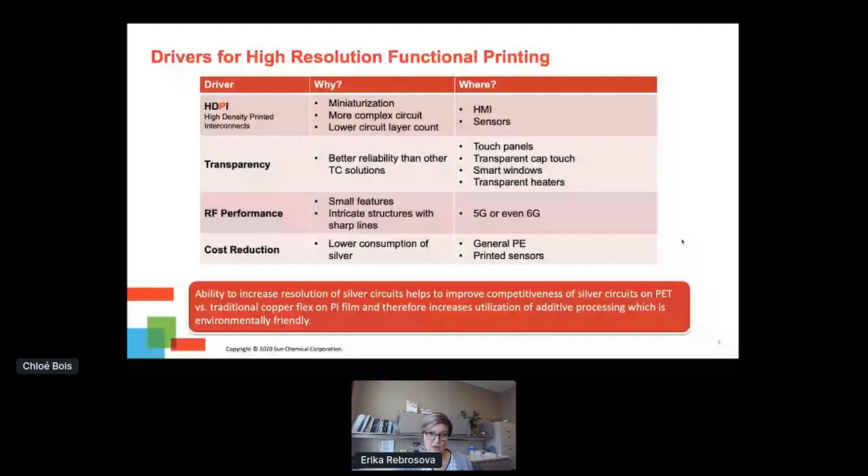And finally, we look into potentially lower costs, right? So printing narrower lines allows for better cost efficiency, as there is less silver ink needed, or less precious metal. And we already know that using additive processing is cheaper and better for the environment. And by developing higher resolution screen printing and materials for high resolution screen printing, we can actually increase competitiveness and expand applications for screen printed circuits versus subtractive manufactured copper circuits. So I think that's really the key takeaway from what I was trying to cover on this slide. Next slide, please.

Pushing limits never comes easy in any area, right? And there are some challenges that need to be overcome in order to really make high resolution silver circuits a reality. I put together this table that lists some of the main challenges, and in respect of time, I won't go through all of these, but I'll mention a few important ones. For example, for HDPI applications, high density interconnects, improvements in assembly technologies may be needed. Now, ECAs are often used in printed electronics, but for more complex and smaller circuits, we may need to look into low temperature solder paste, which would be more suitable for better alignment and reliability of the joints.

Press room cleanliness becomes more important, as small specks of dust and fibers can really affect production yield. So this is something that the print shop needs to get on board with, right? They need to start looking at the cleanliness, maybe introducing a certain level of clean room environment into their process, and the handling and the procedures.

And from the materials perspective, as the traces get smaller, we really need to maximize conductivity of inks to be able to deliver sufficient current carrying capacity for a given application. So there is definitely an opportunity for innovation, not only in materials, but also in the manufacturing processes itself. All right, next slide, please.

So let's look at some actual numbers and targets for trace dimensions. Today, production scale silver circuits are not much smaller than 125 to 150 micron lines and gap resolution. I'm talking about large scale commercial production programs. Some of the finer lines are already being manufactured: early production, smaller scale or niche applications, or maybe high value parts and things like that.

They are actually looking at around 100 micron traces for interconnects and about 50, maybe 40 microns for transparent applications. But there are still some challenges with production yields, especially when it comes to larger screen frame sizes and long runs. The in development targets are certainly below 50 microns and ideally even less than 25 microns.

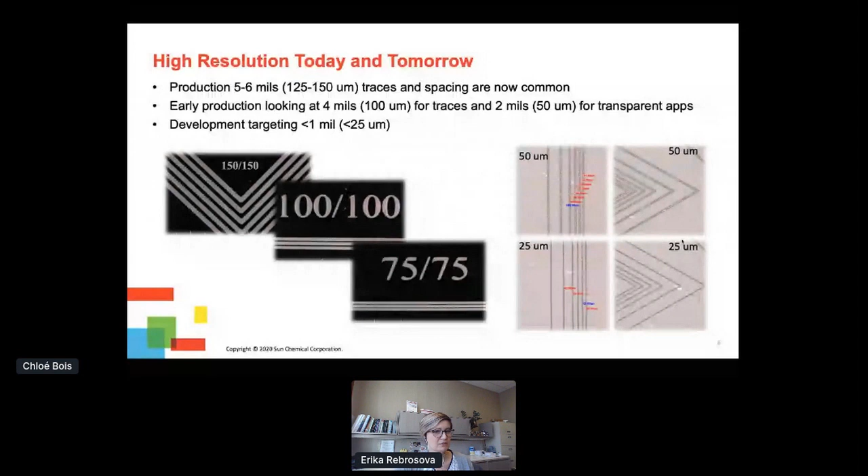And here you can see the images, some examples of our conductive paste and their printability that we've done in the past. You can see some 150 lines and gaps, 100 microns, 75, and then even down to 25. And I'm not quite sure how you're seeing these images, but I see them a little bit rasterized, so hopefully you can see them a bit clearer. Next slide, please.

From the manufacturability standpoint, there are many factors that affect the outcome, things like ink rheology, particle size, type of the substrate or treatment of the substrate, screen parameters like mesh count, emulsion thickness, squeegee shape and hardness, and of course the printing process itself, whether it's the printing speed, squeegee pressure, snap off distance, and even operator skill. All of these will affect the outcome. And it really is a whole system that needs to come together to realize successful high resolution screen printing. Next slide, please.

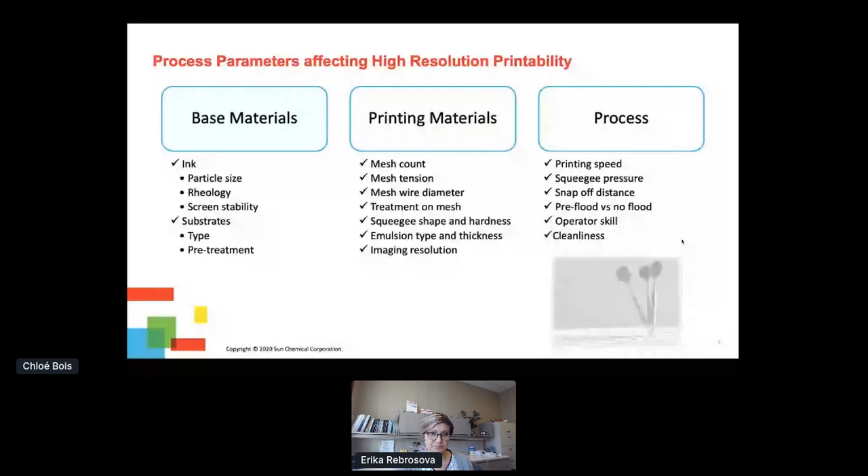From the ink design perspective, there are multiple things we consider when formulating a paste for high resolution printing, or for any application, really. And we need to carefully select individual components as they all contribute to the final properties of the paste. I won't get into too much detail on this slide. You can use this as a reference, but I will cover some of these topics in the next slides. Next slide, please.

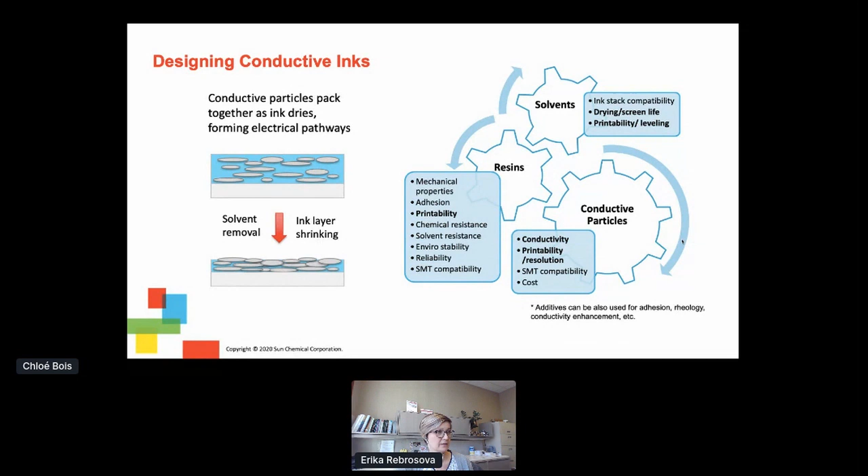All right, so conductive particles are really one of the main components, particles that contribute to conductivity, right? They affect not only conductivity, but also rheology, printability, stability, and things like that. And not to mention the cost, right? As you know, silver is currently the dominant metal of choice for conductive inks, although there are some alternatives on the market, which we will hear about from the next speaker. But let's go back to silver.

So for the silvers, there are many shapes and sizes available, from large flakes to fine flakes and powders to nanoparticles, and even particle-free options possible in the form of molecular silver inks or precursor silver inks, as we heard from Arnold at NRCC yesterday. And each have their advantages and disadvantages, but really all are viable options in one way or another.

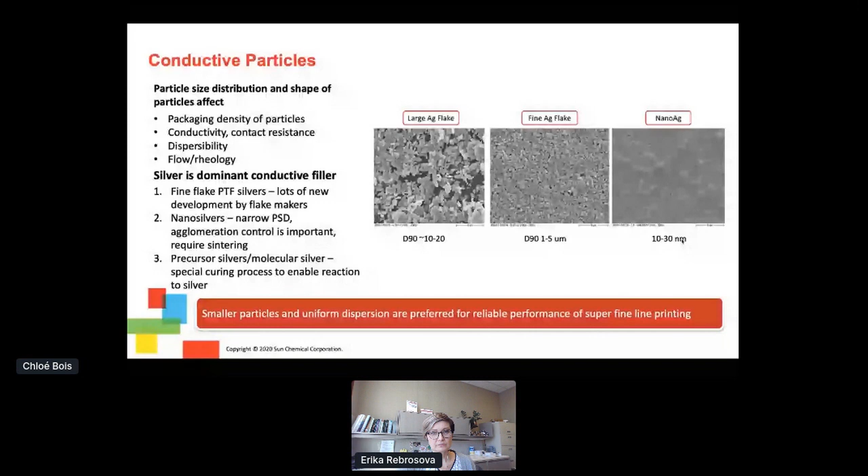Viscosity of the paste is a very common property that we measure and report. We really kind of measure it on a daily basis, multiple times. But in this case, really for high resolution printing, viscosity alone is not a good predictor of how the paste will perform in fine line printing. We're really looking to study or to understand the full rheology profile of the paste.

We're looking for higher thixotropy and pseudoplastic behavior, or a paste that will recover fast after printing, that will thin down with the shear, but then recover fast when the shear is removed or when you lift the screens, so that the lines are not really slumping and spreading too much.

Okay, next slide, please.

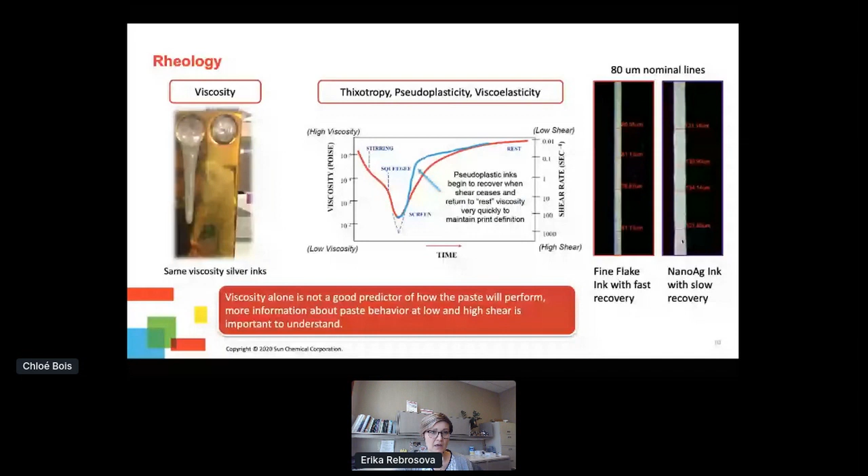All right, next slide, please.

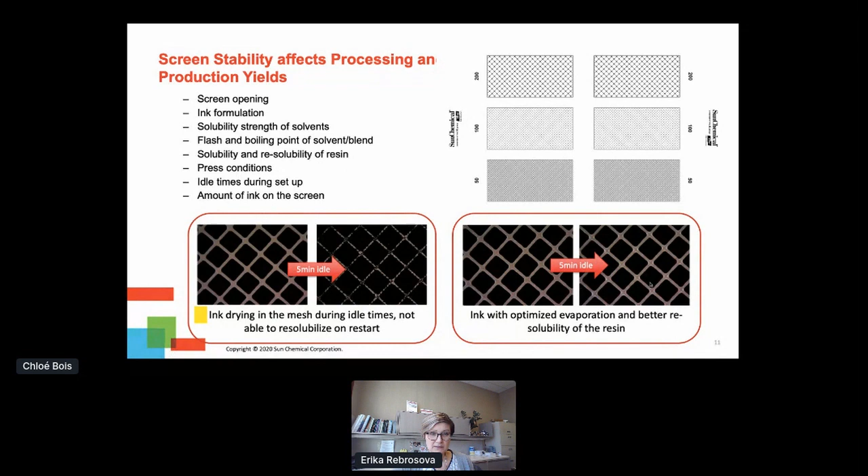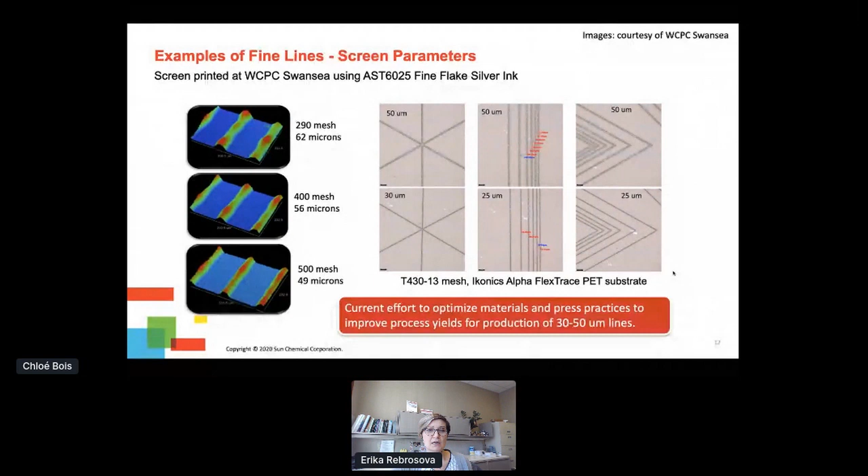Next slide, please. I'm near the end of my 15 minutes.

And, you know, we continue to work collaboratively with our partners to develop materials as well as optimize processes. We're looking at the squeegee effects, the printing speed effect. We're looking at multiple substrates and things like that. We're working collaboratively with Kiwo on emulsion and emulsion release coatings that actually help printability of fine lines. So we'll be presenting more data as the year goes.

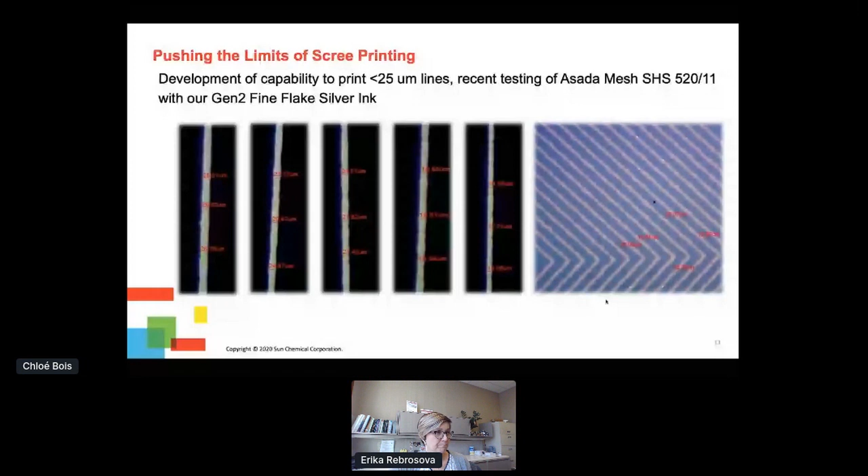And in the last slide, please. Actually, I think there was one before this one, Chloe.